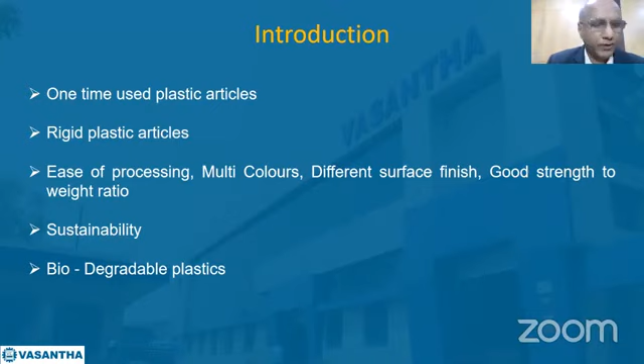Another aspect is sustainability. The problem we have is the mechanism of disposal, especially in developing countries or the third world countries. If we can have proper legislation for the disposal mechanism, plastics can be the best material for any product designer to choose. Another solution for sustainability can be biodegradable plastics, wherein a lot of research is going on, and already some people have started using these plastics on a small scale basis.

So having said all this, rigid plastic parts have become very important, and also the manufacturability, or the method of manufacturing, and its related tooling. So this is where Vasantha comes into picture as a mold maker, and brings me to today's topic of advances in design and manufacture of plastic injection molds.

Though lots of new technologies were pursued in the West for many decades, such new technologies were adopted in India only since about two decades or so.

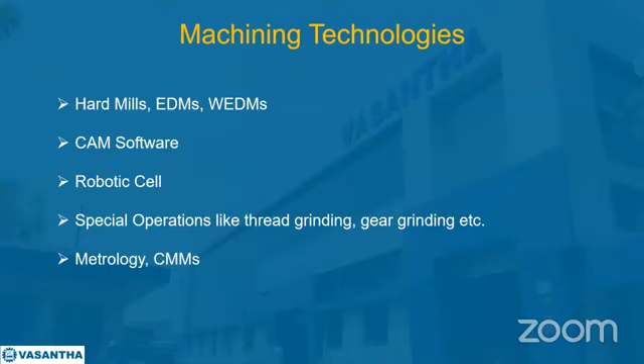So all these inserts and plates would go through the metrology department, where we have advanced CMMs from Carl Zeiss, including both contact type and non-contact type. Contact means touch probe, non-contact means cameras. On one machine we have a probe, but where the probe cannot reach, it uses a white laser camera and infrared camera to find the XYZ coordinates.

After doing all this, when the mold gets assembled, it goes into a testing area where we have advanced injection molding machines from different brands, most imported from Germany and Japan. Some of these machines are all-electric.

We have rotary tables and servo technologies as I mentioned, and we use in-mold closing technologies wherever applicable. I'll come to that in the next slide, where we specialize further.

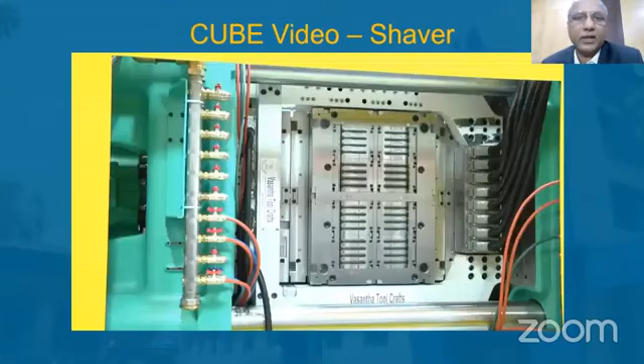Basically, what we are talking about with MIM is plastic injection molding combined with some powder metallurgy technology. These powders get injected into an injection mold, and the part which comes out, we call it the green part - it is metal powders bounded by a binder.

So then we put them into a debinding furnace, where we take out that synthetic chemical by heating it up to 200 to 250 degrees. Then you have a honeycomb kind of structure. The first piece is called the green piece, the second piece is called the brown piece.

It can be a little fragile, but it won't fall down. Then this brown piece is put into a sintering furnace, where we heat it up to almost 1200 degrees based on the steel composition. These products shrink almost 20-22%. In plastics, we talk about 0.5 to 1.5% shrinkage, whereas in MIM, they shrink about 20, 22, 23% by size. Then finally, it would be something like 99% solid density.

This technology is very good if you want to make, say, 50,000 pieces per day of a small metal part having intricate shapes and requiring good accuracies. There's no other method other than MIM, because you can't be cutting steel and machining those parts - it would be very expensive. So for any medium to high batch production of small steel parts requiring good accuracies, this is the technology.

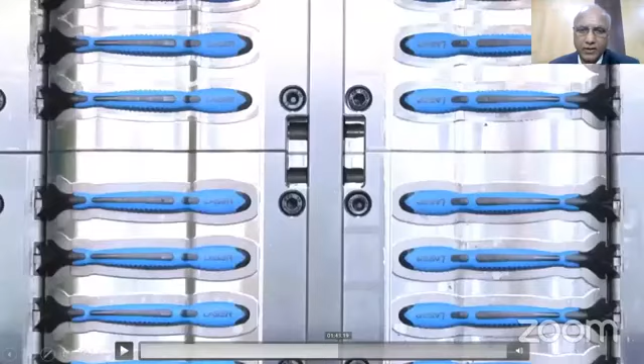Basically, on the right side, you have a primary injection, which we call the first phase. The black one you see in front of the operator is the cooling phase, the second phase. In the next rotation, that second phase moves to become the third phase, where it receives the second material, the blue material. In the next rotation, the third phase becomes the fourth phase, where ejection takes place. So in parallel, you're injecting the first color, injecting the second color, cooling the part, and ejecting the part, all at the same time.

So theoretically, the cycle time should reduce by at least 50%, but in practice it almost reduces by 30 to 40%. For the same article, a rotary mold used to run at about 12.7 seconds, and this 32 cavity mold runs at about 7.5 seconds.

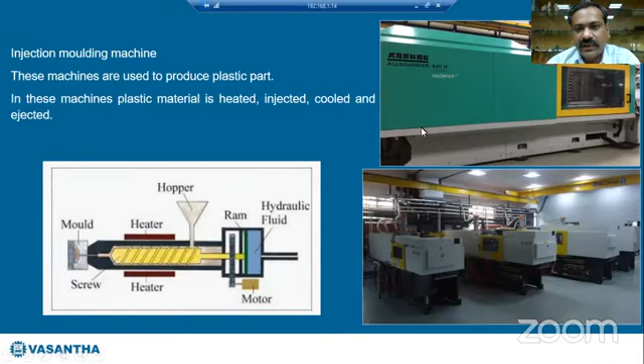On your right side, we have some injection molding machines presented.

Here it is, in the initial days, how we used to do the design activities. On your right side, you can see the drafter boards where designers used those drafters in initial days for creating the mold designs. They used different sorts of pens or pencils to differentiate the lines—the border lines, the main surface lines—and used calculators for measurements, and each and every part would be drawn manually on those boards in those days.

Actually, even from my side, when I was in CIPET learning the training in the institute, we used to draw on the boards itself.

After completing the drawings, these tracing sheets would be taken and converted into blueprints, and those blueprints would be used for the manufacturing of the parts, released to the manufacturing team. Based on those detailed drawings, they would start manufacturing—cutting the steels and making the core and cavity parts and other accessories inside the mold.

Nowadays, instead of drafter boards, we are using high-end workstations and advanced software for designing and drafting of the plastic components, mold assemblies, detailed parts, and material lists. Instead of manually handling all these activities, we now depend on high-end workstations with systems and software, which are used to reduce errors and also reduce the time for completing the design activities.

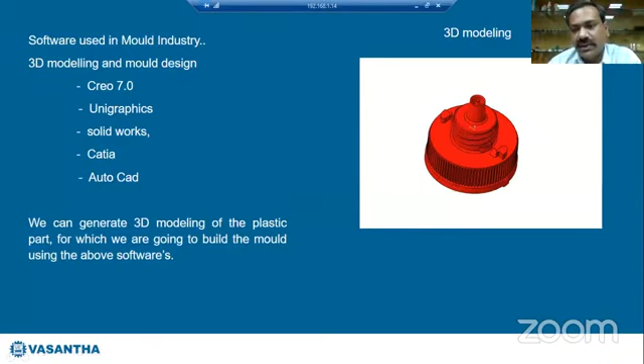So onto your right side, it is actually a 3D model what we have created using Creo software. And these are the flow analysis softwares, Moldex3D and Moldflow from Autodesk. Both the softwares are used for plastic flow and cooling analysis. These softwares will guide us in indicating the below points and predict the fill pattern, any issues before cutting the steel. So we can predict what is the best gate locations, fill pattern, effective cooling design, defects on the part, and multicolor, multi-gate, and multi-material. So before even going for any steel cuttings, we can do all these activities using the software.

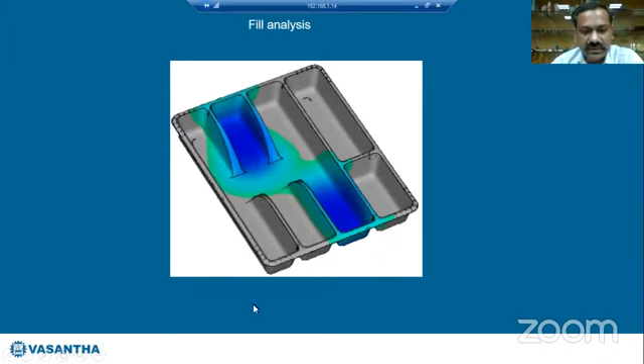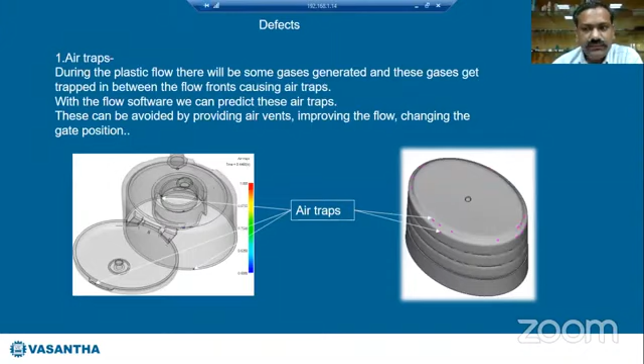And the second issue is about the weld lines. So this is like 2 opposite flow fronts meeting each other, and there we would be seeing some sort of line or a mark on the product. This also can be improved or avoided by changing the gate positions, improving the flow pattern, and sometimes by increasing the wall thickness or working on the wall thickness parameters, we can avoid these weld lines.

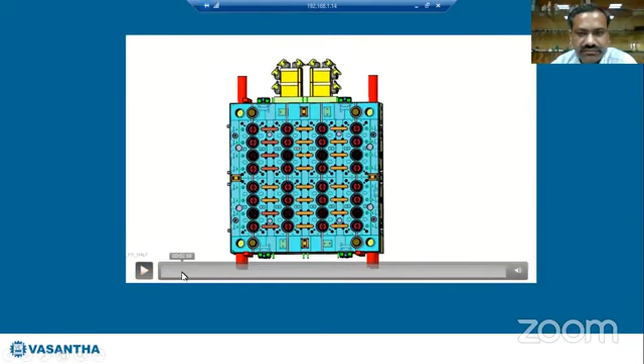So this is about the manufacturing. Here also we are using Creo 7, where we can use electrode extraction and generate the CAM program. Smart electrode is also used for electrode extraction. Delcam is for generating the tool path. Unigraphics NX is also the CAM for tool path generation. And CAD Micro is the software used for wire cut machines.

This is the palleting concept we are using in house. Initially the blocks will be placed on a pallet and would be straight away transferred into the software. The robot will pick up this pallet and place it into the milling machines and also EDM machines. So it would be program generated, and accordingly the pallets would be placed and machining will be taken up by the robot.

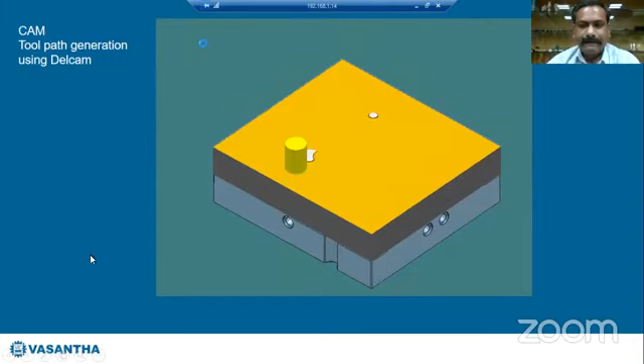This is about the process of a mold, depending on the following parameters - the designing process of a mold actually. So it depends on the plastic part, the injection point location, and type of runner system. Regarding runner systems, we have three different options: one is the cold runner, the other is semi-hot runner, and the third is the hot runner system. I will go in depth in the next slides.

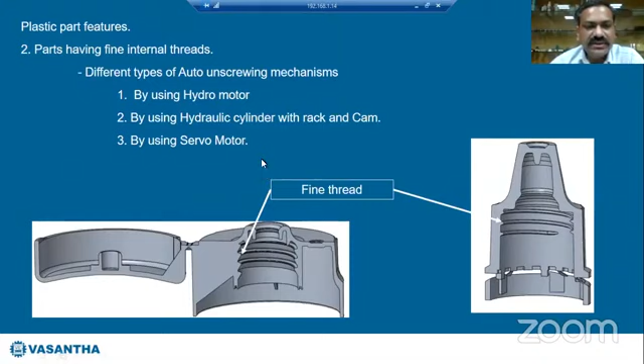And this is about the external threads. So for the same part, we have internal thread as well as external threads. For the external thread, we use the sliders mechanism, which is operated using finger cams. Instead of finger cams, we can also use dogleg cams or hydraulic cylinders. Such mechanisms can be used for releasing the external threads.

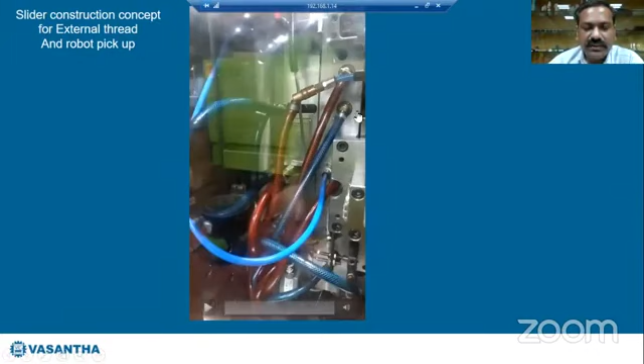This is also one of the videos where we have external threads, and those sliders are being operated using a hydraulic cylinder, with a robo pickup for picking up the components. Instead of letting it fall down, the robo comes and picks up the samples.

And this is about the internal undercuts. Here we are using lifter mechanisms. There would be a lifter running on an angular surface, moving it inside. The undercut gets relieved while the plates are being pushed forward.

And this is the other option for internal undercuts. It is a collapsible core design, which is a more complex structure. Instead of using unscrewing, we can use this collapsible core concept.

And this is about the flip-top closures. It is a special category of closures wherein the mold is based on the size and shape of both the flip and base. We design most of these molds with the in-mold closing system, as my MD sir has explained about such parts and the construction of the mold.

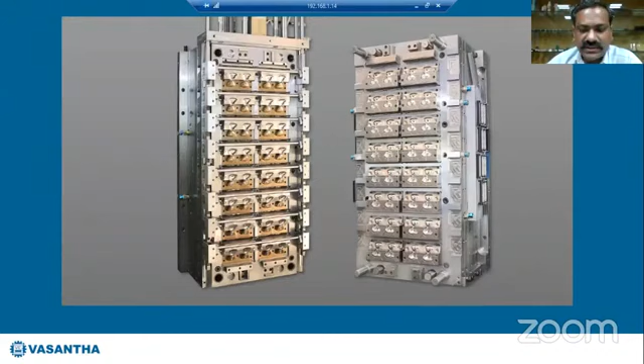And this is another option, a bicolor concept with a core back mechanism. This is a Navratna cap which we supplied to the customer. We have this core, which is moved forward and backward using a hydraulic cylinder within the mold.

Initially, when we are filling the red color, this core is pushed forward to avoid the flow of red color into the yellow area. After filling the red, we push back or pull back the core and start injecting the gold color. After filling the gold, we open the mold and eject the component.

And these are some examples where the core back concept has been used. This is for Dow, this component is for L'Oreal, and the bottom one is for Himalaya. Even this red, green and red one is also for Himalaya. All these molds are made using the core back concept.

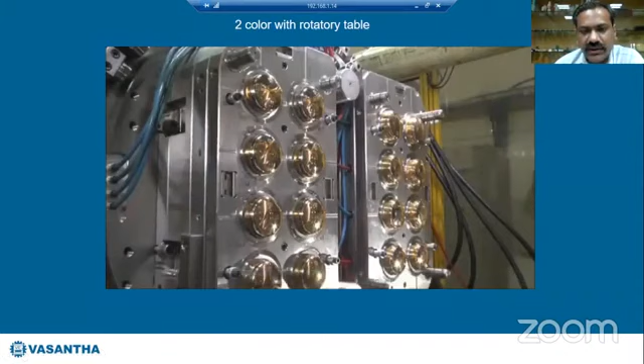So this is the rotary concept, wherein we have two different stations. In station one, we have one cavity, and at a different stage we have a second cavity to fill the second color above the first.

This is about the cold runner system. The plastic material is injected from the machine through the nozzles into the mold and through the runner into the component area. Here we lose or waste a lot of plastic material over this surface, so the virgin material cannot be used at the second stage.

And here it is a semi-hot runner, wherein the material is injected into a hot runner system through the nozzle, and on the bottom you can see the cold runner system leading into the components. So here also we lose some part of the amount. Instead of the cold runner, where there is huge wastage, here some part of the polymer can be saved with the semi-hot runner system.

And this is a fully hot runner system, wherein the polymer is directly pushed into the hot runner, nozzle, and the component. So here there will not be any plastic material getting wasted; virgin material is straightly pushed into the component for every shot.

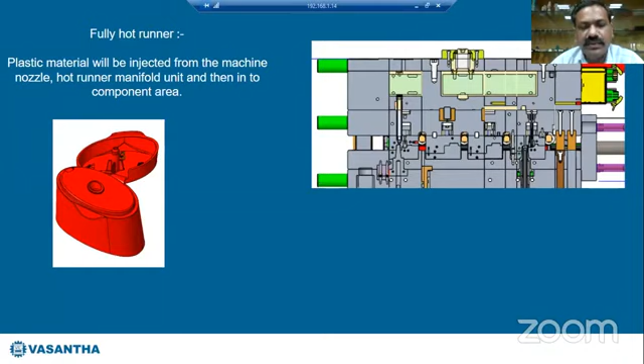This is about the rotary mold. These molds need a rotary table, an additional attachment fixed on a moving platen of the injection molding machine. What you see on screen with a teethed surface, we call the rotary table, which has to be fixed on the injection molding machine. It's an additional attachment or accessory.

So let's continue. We have seen advancement in design till now. Let's move on to the manufacturing. Once a good design is done, comes the manufacturing stage, wherein we convert the design into a physical part. Once the design is released for the shop floor, based on the drawing, we manufacture it depending upon the sizes, whether round or square.

The general procedure for manufacturing a complete mold is: any mold consists of so many parts, maybe around 50 to 200 or 300 parts, depending upon the size, cavitation, and complexity of the mold. Once the design is done, all drawings are released for manufacturing to the planning department, which segregates all the drawings and processes them for further manufacturing.

Generally, all the drawings are divided into 3 categories: one is inserts, second is in-house, and the third is mold base.

Inserts are the parts that form the plastic component area, wherein the plastic actually comes in contact with the insert. Then comes the accessory parts like unscrewing mechanism, bi-injection mechanism, or the in-mold closing (IMC) mechanism. All these are accessories, which we call in-house items, that are produced, which are not inserts but help the mold function. Then comes the mold base part, wherein large plates are manufactured in which all these accessories and inserts are fitted.

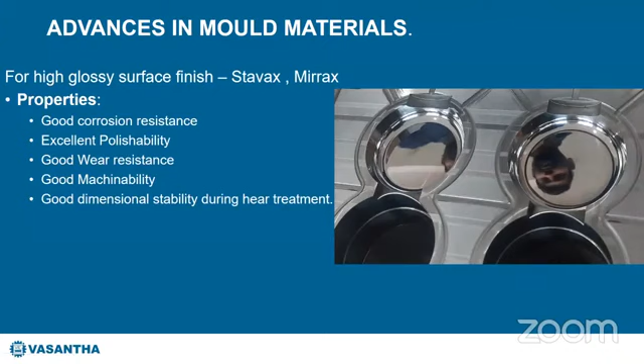Orvar Supreme is the material which we use generally for the core side of the mold, which has good machinability, excellent through-hardening properties, good high temperature strength - that is high hot hardness - excellent toughness, high level of resistance to thermal shock and thermal fatigue, and good dimensional stability during hardening.

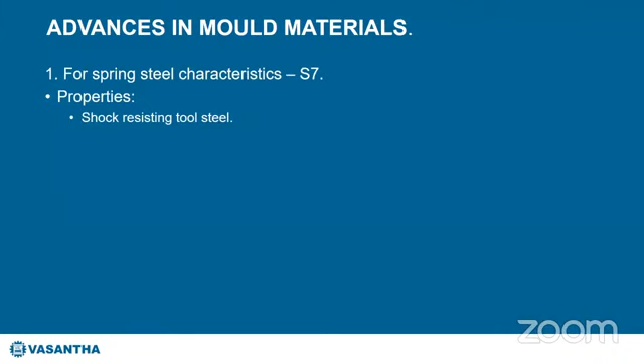Unimax is the material where we use it generally for good thermal fatigue resistance and good wear resistance. It also has good dimensional stability during heat treatment. S7 is a spring steel material we use for shock resistance, generally used for sprung cores and lifters, where spring steel is of great help.

Then for high conductive materials like beryllium copper and Rovalma Fast Cool 50, these are used where we need to extract heat faster and reduce the mold cycle time.

After selecting the right material for the inserts, we need to process it for manufacturing to give it a physical shape. To do this, we need high-end machinery which will help us bring the drawing into existence as a physical insert. Generally, any tool room majorly focuses on three things: on-time delivery, quality of the mold, and life of the mold. All this depends on the type of machinery used for manufacturing the mold parts.

It should be high-end machinery with a high level of accuracy. We have many CNC milling machines, EDM machines, wire cut machines, then thread grinding, profile grinding, surface grinding, cylindrical grinding, and a 3D printing machine, that is EOS. Let's see one by one by playing some videos.

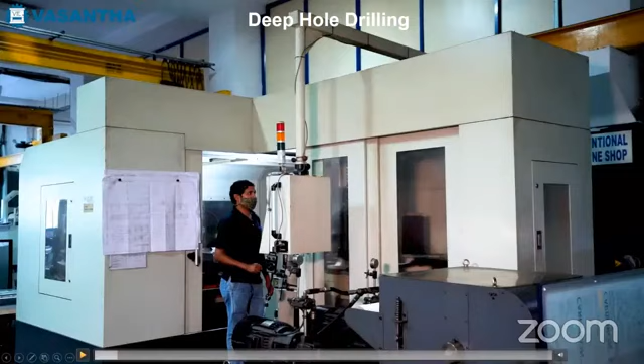This is the deep hole gun drilling machine, in which we can drill holes up to 730 millimeters length with an accuracy of 0.1 deflection. In total it is like 1.5 meters - half meter on one side and half meter on the other. It can also do milling operations, and it also has multi-spindle functionality. Let's see the video, it's 50 seconds or so.

So this is the mold base plate, wherein we are going to drill a hole around 500 to 700 mm long or deep.

So there is one more video for high speed milling. This is for the F8 Makino machine, which has a bed size of 800 by 1300 mm with an accuracy of around 5 microns and a spindle speed of around 12,000 RPM. Generally used for mold base manufacturing.

So we have one more high speed milling machine from Japan, imported from Japan, Yasda. The bed size is around 900 by 1500 millimeters with a spindle speed of around 24,000 RPM. We have very good accuracies in this, even less than 5 microns.

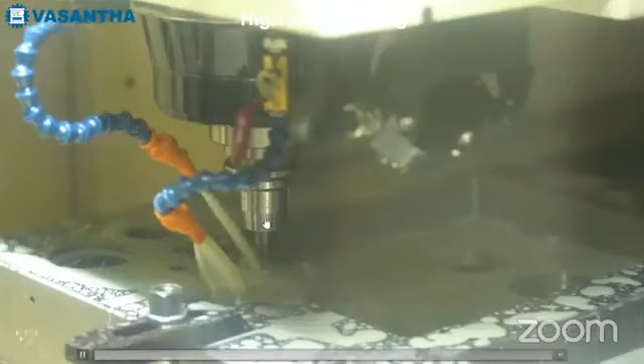So next is the video for the jig grinding machine. In this machine we generally drill small holes which need to be very precise, like the gate diameters for wall pins and all. The minimum hole that we jig grind is 1 millimeter, and we make all the H7 holes in this, and the RPM for this is 1,20,000 to 1,60,000. So it is very accurate and precise.

So all the gate holes are done in this machine.

So as our MD sir Shri Dayanand Reddy Garu has said, we have two robotic cells. One we use for milling operations, and the other one we use for EDM operations. So this one which I'm showing now is for the milling robotic cell, wherein the robot does all the operations like picking of the raw material, placing it on the milling machines, and taking the zero and all. I'll just explain once this video starts.

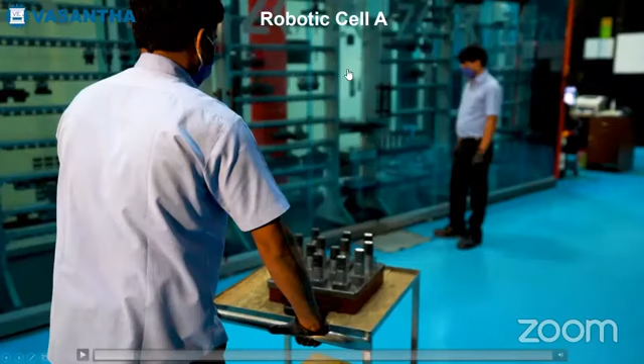On the center, we have the robot which picks and places the raw material on the machine and off the machine and on the CMM. So these are the inserts that this operator is carrying to the machine. These inserts are fed to the robotic placement cell. The robot picks this based on the command given from the CMM machine.

So this is the robot, the center robot. So this CMM machine is connected to the robot. The center zero of the block is taken care of by this CMM machine. So the chances of getting error, which we generally get manually when the zero center for any block is taken by the operator in the conventional method, is eliminated because the CMM machine takes the zero.

However, the workpiece need not be fixed in a desired position. However we fix it, the CMM machine takes the correct position of the raw material and processes it for further operations.

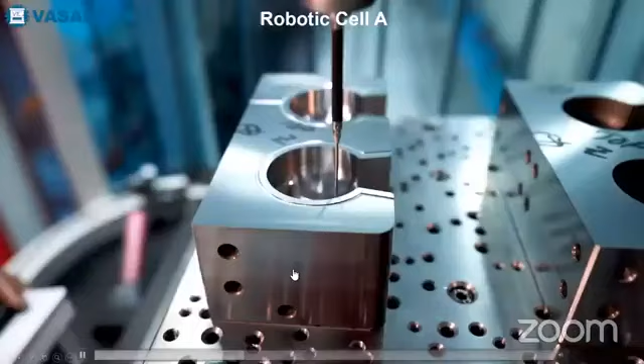So that was the magazine of the milling machine which is connected to the RoboCell. The zero for the CMM machine, the robot, and the milling machine, all three are the same. So the chances of getting an error is next to zero. And the spindle speed for these machines is 45,000 RPM.

So that was all about the milling robo cell for the milling operations. We have one more robotic cell in which we do the EDM operations.

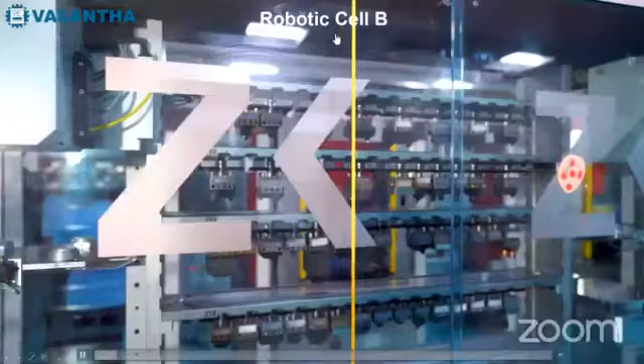This is for the EDM. Generally, these electrodes are made up of graphite and copper, depending on the requirement. The graphite wears out faster, but is used wherever we need sharp edges. So mostly we use graphite, and copper has less wear and is also expensive.

But a few serrations and all that we generally see on the component can be done only using copper electrodes. So these are picked by the robot and placed on the EDM machines connected to this cell, and the EDM operation is done.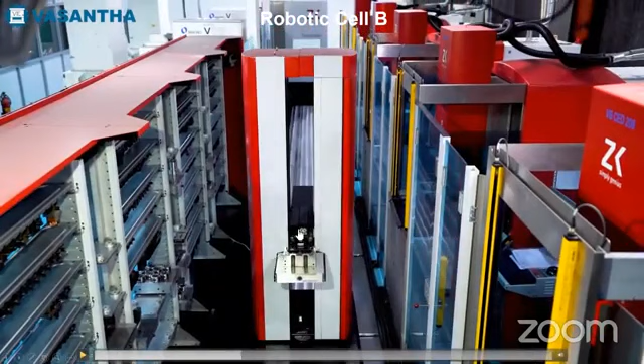So once the operation is completed, it is moved to the CMM machine to check for the accuracies.

So once all the operations are done, it is taken to a cleaning chamber where it is sprayed with oil to remove all the burrs or the dust or the carbon, and then moved to the CMM for the final inspection. It is cleaned here. So no manual intervention.

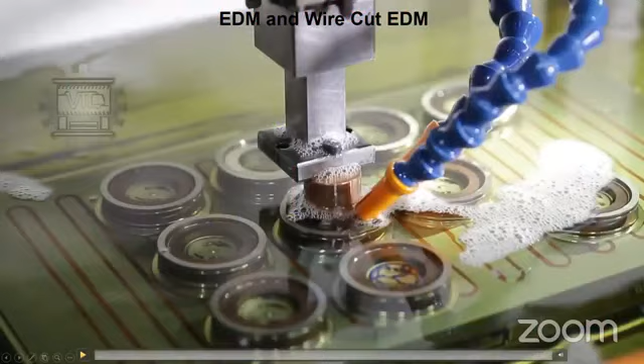The electrodes are plunged using a dielectric medium, wherein two opposite polarity currents are passed, and material is removed to get the desired shape, which is not possible using conventional milling or any other method.

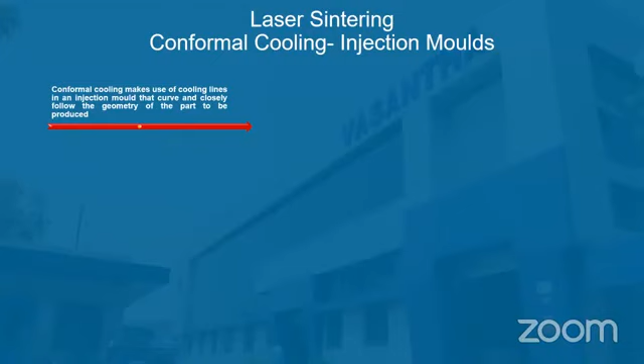So the next latest technology we have is conformal cooling using laser sintering. Conformal cooling makes use of cooling lines in an injection mold that curve and closely follow the geometry of the part to be produced. In injection molding, the cooling time of a finished product can constitute up to 70% of the cycle time in series production. For example, if the mold cycle time is 15 seconds, sometimes 10 seconds is the cooling time. So if we can reduce the cooling time, we can greatly reduce the overall cycle time of the mold.

Conformal cooling channels in molds and mold inserts optimize heat dissipation and enable shorter cycle times and better plastic product quality. Using conformal cooling, we can go closer to the plastic part, which extracts heat faster and reduces the overall cycle time.

Conformal cooling is also a tool to help decrease rejects, because with this technology we don't machine anything. We build the insert layer by layer - that is additive manufacturing, also called additive manufacturing using powder technology which is fused using a laser. We can see it in the next video we have.

Because of the uniform part cooling, molded-in stress can be reduced, and this produces a stronger, warpage-free part, increases part safety, mitigating part failure and recall risk. So the risk of rejection is very low when we use conformal cooling technology.

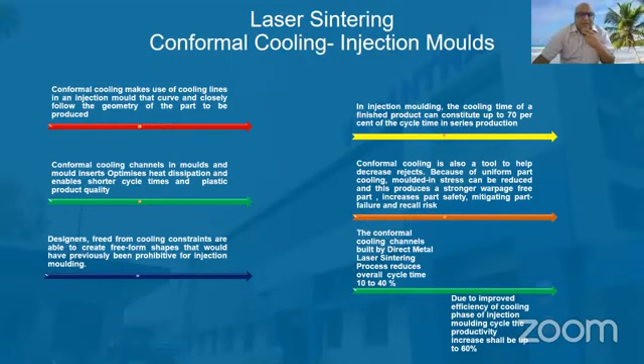So the conformal cooling channels built by the direct metal laser sintering process reduce overall cycle time by around 10 to 40%, depending upon the part geometry and the type of conformal cooling. For example, if the part is very small, the cycle time reduces from say 12 to 10 seconds, depending on the part. Due to improved efficiency of the cooling phase of the injection molding cycle, productivity increases maybe up to 50-60%, again depending on the part geometry.

So the main advantages of conformal cooling technology are reduced cycle time and improved product quality, drastic reduction in rejects - rejection of inserts becomes minimal or next to nothing - which directly saves production costs, improves overall efficiency of the tool and its performance, and also the profits.

So we did a case study in which we looked at mold function without conformal cooling and mold function with conformal cooling. Without conformal cooling, it takes almost 50% of the mold cycle time just for cooling the part. When we apply the conformal cooling technology, it reduces from 50% to 25%. So we have a saving of 25% when we use the conformal cooling technology.

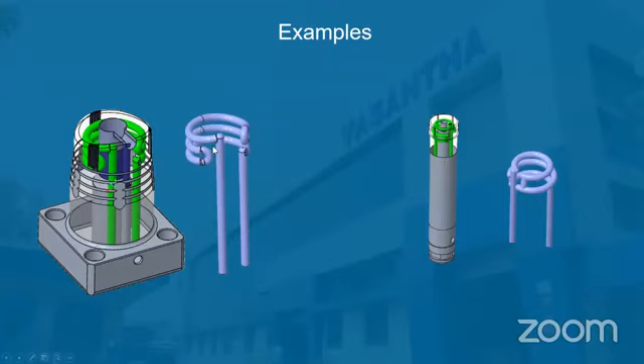So these are a few examples showing core inserts where we have drilled. These straight lines can definitely be drilled using the conventional drilling method, but this curved shape which follows the geometry of the insert and thereby the plastic part to be produced is only possible using additive manufacturing, that is, conformal cooling technology.

So these are the few examples. Here also you can see these inserts are for the spray cap. Generally we use spray caps or heat caps at home.

So this is the EOS machine we are talking about, which helps us optimize the cycle time and improve the product quality.

There is a small video of the EOS machine showing how it functions, using powder technology. The grain size of the powder is generally 20 microns, and it builds layer by layer. Every layer is about 40 microns, shot by a laser which burns only the area of the insert, and wherever there is no insert or like cooling areas, it won't burn, so we'll have a hollow space there.

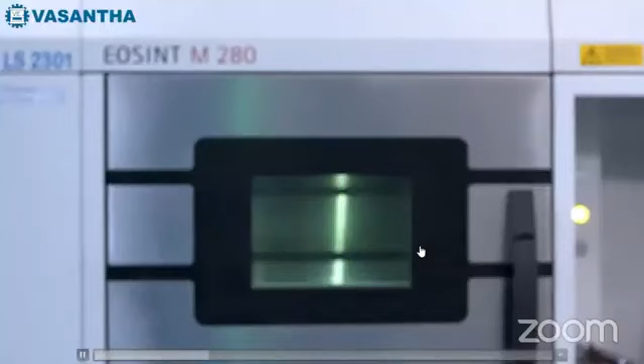So this is the powder, wherein through laser we are burning it to make it solid. You can see it leaves some spaces in between, which are the cooling channels. Again one layer is sprayed on it, and again the laser starts building it. These are a few examples.

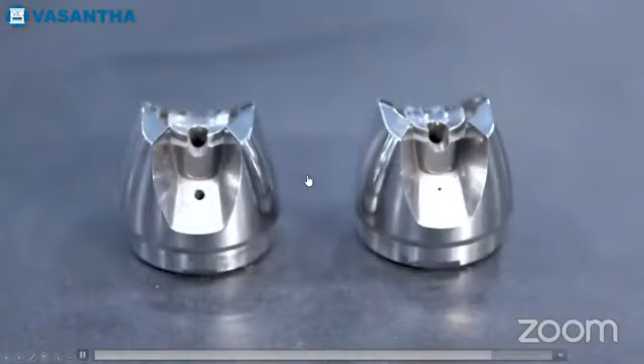This we have seen already in the design, wherein we had a 22-second cycle time using conventional cooling method, then we could reduce it to 17 seconds. This was the part produced. That was a 16 cavity mold, 2x8 layout, which we can see on the left side of the screen.

So we can see the cooling time from 12 seconds, we were able to reduce it to 6 seconds.

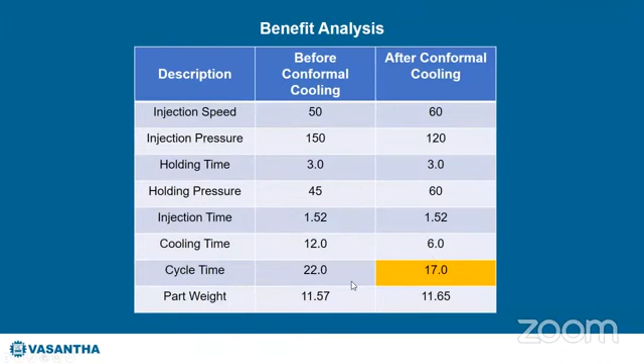After manufacturing all the inserts, we need to think about the life of the insert. To enhance the life of the inserts, we do two operations: generally hardening and the coating process. All the part forming inserts and some accessory parts of the molds call for hardening to achieve approximately 48 to 52 HRC Rockwell hardness.

Some parts having close clearances and shutoffs need to be nitrided to have a hard surface for anti-friction properties, like the sliding elements or moving parts in the mold which generally wear out soon. So we do nitriding, which forms a smooth hard layer on it to avoid wear, which enhances the anti-friction properties of the insert.

The hardening process is done using a vacuum heat treatment plant, which we have seen in the video by our MD Shri Dayanand Reddy Garu. Vacuum hardening is widely recommended for hardening of inserts due to its very low distortion, uniform hardness, and low oxidation. After this hardening, there are some coatings we can adopt in the mold parts, like TiN coating, CrN coating, DLC coating, hard carbon coating.

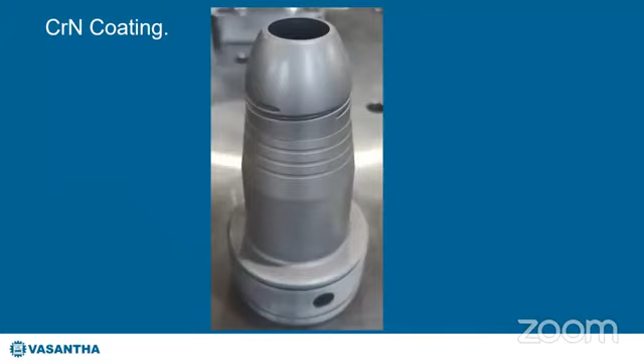After this, this is the core insert with CrN coating. CrN is chromium nitride coating. We can see it in silver form. The advantages are wear resistance, rust prevention, and mainly ease of ejection, mostly done on core side inserts where we need the ejection of the part.

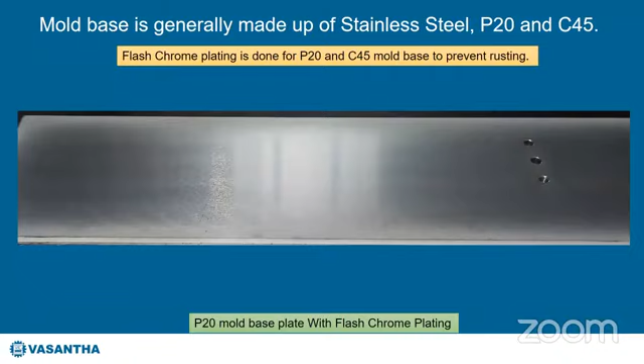After this comes the DLC coating, which reduces the friction and gives the anti-seizing property for the inserts. This is generally done for moving elements like sleeves. Then we have hard carbon coating for beryllium copper, and flash chrome plating, generally used for mold base materials made up of P20 and C45. Stainless steel does not require flash chrome plating. So this was all about the manufacturing.

Lastly, I would like to show one more video of a stack mold, which is a high technology stack mold and a robo pickup. We were not able to see it in the design stage. So let me play it here.

So this is a stack mold which we were talking about. We have two places where the plastic material gets injected. Instead of getting only 8 components in one machine, we can produce 8+8, 16 components in one shot. The only thing is the mold thickness increases. The weight of this mold was around 13 tons and the tonnage required for this is around 800, so this is the 800-ton machine Netstal which we have.

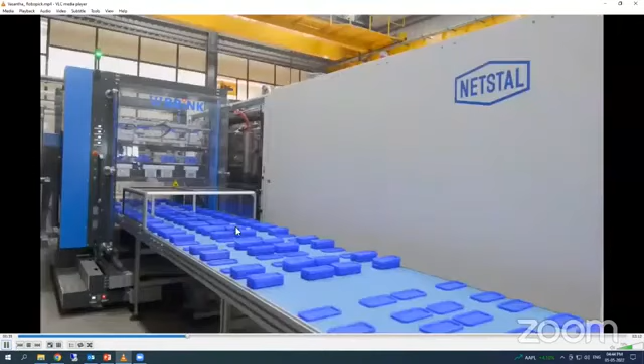Once the robo picks the parts from the mold and places it, the robotic arm brings it out. We have outside IMC which closes this flip, and puts it on the conveyor belt. You can see the cycle time is very aggressive, that is 7.5 seconds.

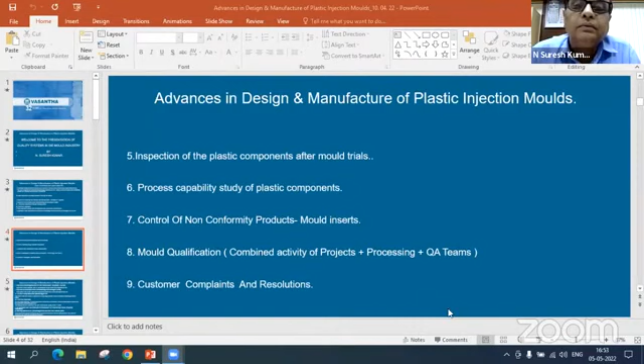Sir, you are able to see my screen, sir? Yeah, we are able to see that. Sir, everybody is able to see my screen? Yeah, it's visible sir, it is visible. Please go ahead.

Welcome to the presentation of quality systems in die mold industry. Quality is the most important aspect of our life and every engineering industry. Quality doesn't come on its own. Quality is the result of continuous efforts and great teamwork. If there is no quality, I say there is no business, and no quality conscious, please shut down the shutters. This is how quality works. Quality has to be there in every organization, in every type of industry. It may be a tool and die making industry, or a textile industry, or automotive industry, or any pharma industry. Whatever the kind of industry it may be, quality is the most important factor that decides the future of the industry, its runnability, and its standby capability to stand in the market.

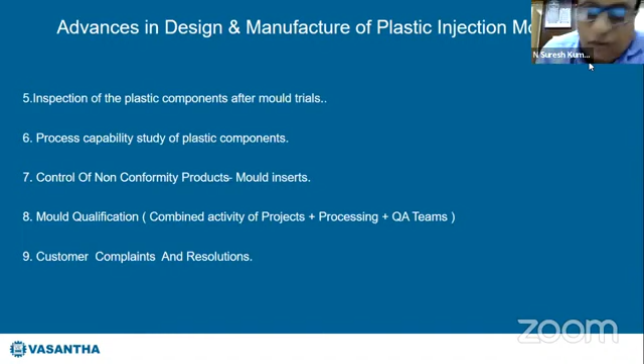Then the quality assurance department also does inspection of plastic components after mold trials are over. Then we do process capability studies on the plastic components. Then control of non-conformity products in the steel parts. And we do mold qualification, which is a combined activity of project management department, processing team, and QA teams. We do have a robust process to handle customer complaints and resolutions. I want to explain further what exactly is done on each point I have explained just now.

The very first thing is inspection of incoming raw materials and standard parts. As per the bill of materials, for each mold we'll have a number of inserts and accessories and mold base. Mold base is the body of the mold, where we'll have a number of plates. For all this, we procure raw material from different suppliers. We import material mostly from Europe, and there are many standard parts supplied by outside vendors. All these parts have to be inspected by the quality department, and we have a robust quality plan made for each category of material and standard parts. The parameters to be inspected are clearly documented, and with reference to that, the quality department will measure, inspect, and do acceptance or rejection. In case of rejection, the part is sent back to the suppliers and proper action is taken.

Then the second most important activity the QA department does is inspection of the mold parts, that is inserts, under manufacturing. That means, suppose the injection mold is 16 cavity, 32 cavity, or 64 cavity, there will be many inserts under manufacturing.

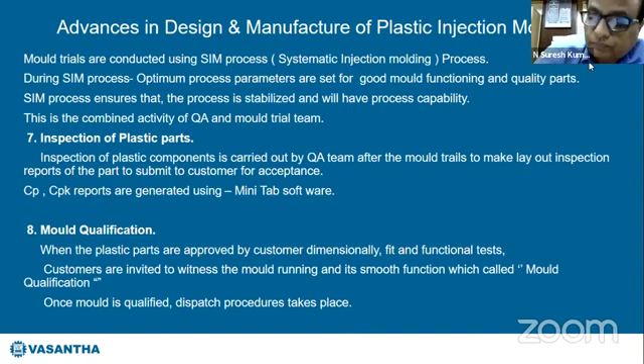At times we do get customer complaints, so we have a process for resolving them. At Vasantha, when a customer complaint is received, we acknowledge it within 1 day, analyze the problem and find the root cause within 2 days, and provide a solution with an action plan within a week. We follow this concept most of the time for the delight and happiness of the customer. The QC tool we normally adopt for root cause analysis is the 8D technique.

Now, regarding advances in quality systems in tool and die making, the systems are strong enough, but the advances particularly relate to the measuring equipment. We have very high-end and advanced machines used for measuring the dimensions and geometry of the steel parts as well as the plastic components.

We cannot forget the basic measuring equipment as well. We use equipment named as follows: vernier calipers, micrometers, bore gauge, height master, hardness tester, and inspection equipment used during and after AHT operations, and of course CMM. I will show some videos - a coordinate measuring machine, and a Rapid Eye, which is like a profile projector but attached to a computer, used to inspect plastic parts.

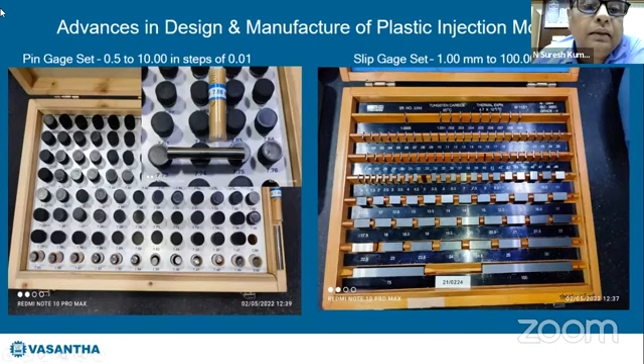And we have a pin gauge set, as you can see. These are small plastic round boxes where the pins are stored so they don't get damaged - they have to be handled very carefully. We have a pin gauge set from 0.5 to 10 mm in steps, and also a slip gauge set.

This is a video of the Trimos instrument, showing how it is used while measuring the heights of an insert.

What he's doing here is we have a probe, which is the horizontal, and there's the probe ball. He will take the reference of this as a datum, a surface table reference, then make it zero-zero. Then he comes onto this step and takes the reading, then onto the next step and takes the reading. There are certain horizontal platforms, three platforms in total. He will take a reading here and a reading here as well. So from the reference, all these steps will be recorded.

This instrument is connected with a small computer screen kind of thing. All these readings are recorded, and we can take a printout of this.

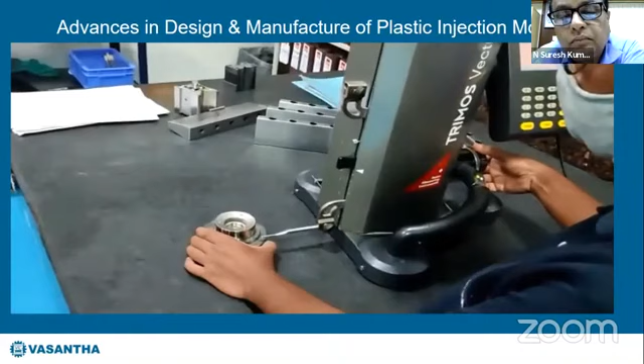That was about the digital height master, and we have another equipment called Rapid-I. This is an advanced version of the profile projector, and this Rapid Eye equipment measures the profiles of the inserts. We have a computer attached to this Rapid Eye, and the measurements are done on the computer. All the readings are saved, and printouts can be taken, giving the deviations from the mean. I'll show the video of this.

See, there is a slider insert. This is placed on the table of the Rapid Eye machine, and you can see the thread teeth are machined. This is done by an EDM process. Now we are checking the accuracy of these thread profiles using this Rapid Eye machine, and this image of the thread profile on this insert is shown on the computer screen with a magnification of 10 times and 25 times.

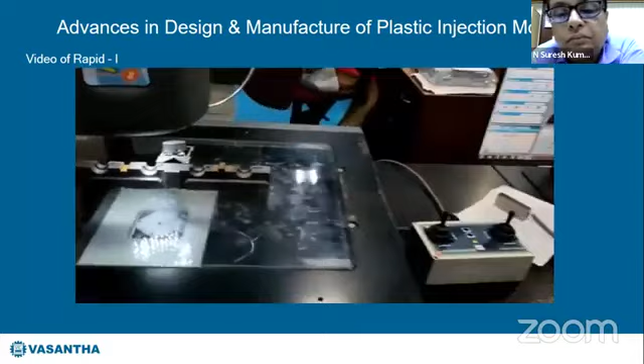This is another very interesting equipment called O-Inspect. This O-Inspect is for measurement of dimensions of plastic components once the mold trials are completed. It has the facility of measuring by touch probe as well as measuring dimensions by a non-touch, optical sensing method. Where the probe cannot reach, certain plastic components have intricate internal shapes where we cannot take the probe and touch to get dimensions. In that case, optical sensing will be used. This machine has the facility to pick edges and dimensions using the optical method where the probe cannot be reached.

And this is CMM. I think we have about 7 CMMs in Vasantha. This is a universal machine called coordinate measuring machine. Most dimensions can be measured very accurately using this CMM, and we use it for inspection of the inserts after final machining is completed, and also for hot runner plates, because wherever the requirement is very close, within 5 to 10 microns, this machine has to be used for particularly accurate measurements. I will show the video of this.

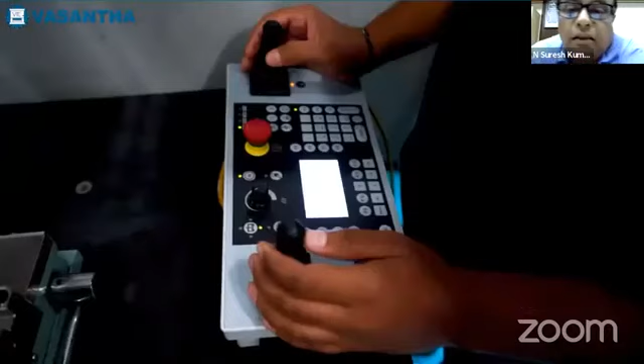The probe is touching the steel insert and edges are being picked up using design data from the computer. The programming is done from a reference, and the points needed are programmed, so accordingly the probe travels and takes the measurements. This is the mold base which is machined and under inspection, so dimensions will be taken in all X and Y directions.

This is the measurement of a plastic component on O-inspect. There is a fixture that is used for clamping the plastic component. The plastic component we can see is actually transparent, that's why it is also looking transparent in color. The plastic component is fixed on an aluminum fixture.

The dimensions of this plastic component are measured by the touch method. We have a very small probe that can enter the inside features and reach them, and the plastic component is fixed using a fixture. So whatever the maximum dimensions are, those can be picked using this probe, noted down, measured and recorded. And if there are any dimensions where the probe cannot reach, we'll use the optical method.

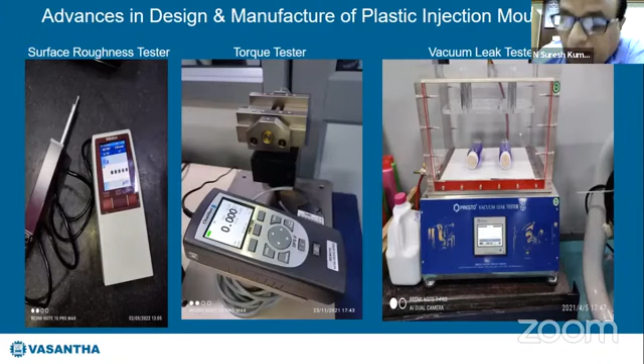We normally put colored water inside, so that if a leak happens, we will see that the cap is leaking. To identify that, we put colored water and place it into the vacuum chamber, so that if there is any leak, meaning the fitment is not correct, the water leaks out and we can identify that the cap is having some problem, or maybe the bottle itself could be the problem. So we investigate and see where the correct action needs to be taken so that this test is satisfied.

From a systems point of view, these are some of the formats we use in our quality department to ensure that the systems are in place. The very first thing is the inspection report, and this is the format that we use for doing the inspection of the steel components.

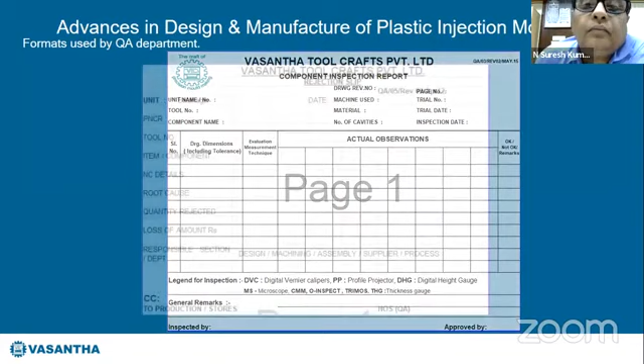And we have a rejection slip. As I told you, the non-conformity products will be there. The rejections could be because of a few reasons, maybe operator mistake, or maybe machine malfunctioning, or other issues like a programming mistake, a manual mistake, or a machine mistake, whatever it is. Whenever a rejection happens, it will be picked up, and a rejection slip will be raised, and the details will be given in the slip, and they will be informed to all concerned department heads to resolve that.

And finally, we have the mold final qualification, mold final test report. After the mold is assembled, we have to check whether the mold is now fit and ready for loading onto the machine. We have certain parameters that have to be analyzed and ensured, like parallelism of the fixed half, parallelism of the moving half, parting line, and blue matching, because these are all done in the quality assembly section, and the assembly team will ensure that the blue matching is correct.

That means there are no openings, because the plastic component has a tendency that even if there is a 20 micron gap, the plastic material seeps out and flashes will come. So we have to ensure that the blue matching is done perfectly, with no undue gaps, so that the mold functions very well without any flashes.

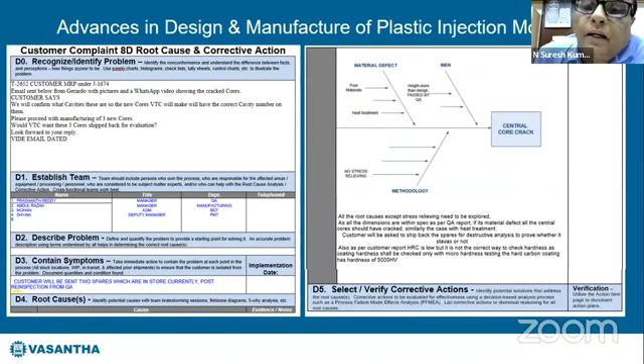And appropriate actions will be taken. If operators have to be trained, they will be trained, and if any equipment fault is there, the equipment will be replaced with new equipment. And if any design issue is there, design corrections will be done. So all the necessary actions will be taken based on this analysis and the data the QA department gives to the management.

And lastly, as for international accreditations, Vasantha is ISO 9001:2015 certified by TUV SUD, and we have all the robust systems, and we follow the latest version of 2015. We passed the 2015 version in 2018, and we have a robust quality management system in place, and we have been following these systems very meticulously.